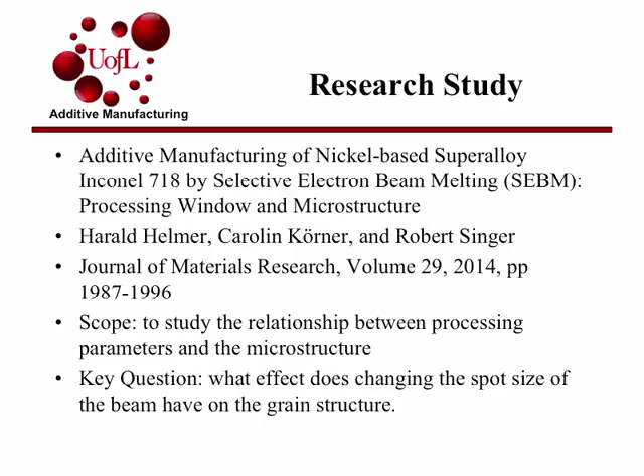One of the key questions they asked was, what effect does changing the spot size of the beam have on the grain structure?

So, experimental approach: they used gas atomized nickel-based superalloy. There's a picture of gas atomized powder.

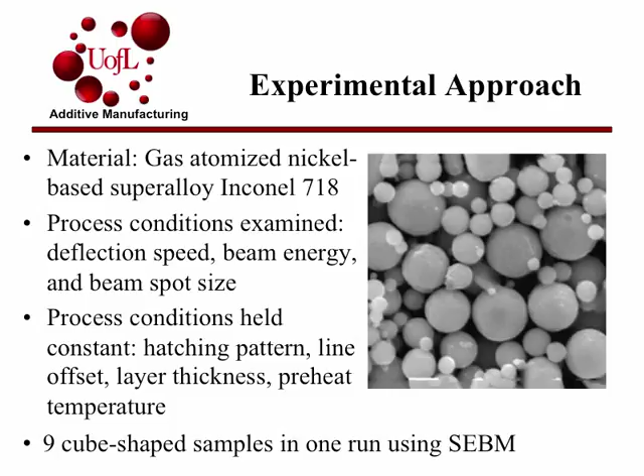The process conditions that they changed throughout the study were deflection speed, or how fast the beam is moving along, the beam energy, and the beam spot size. They left all the other process conditions constant, like the hatching pattern - they did one layer this way, then rotated 90 degrees - and kept the line offset, layer thickness, and preheat temperature the same. For this study, they just made one run and made 9 cube-shaped samples from it using SEBM.

So the key results from the first study: how do the process conditions affect density and top surface unevenness? The left graph is for the larger spot size, I think 500 micrometers, so the defocused beam, and the right graph is the focused beam.

In both cases, the black markers are the preferable conditions - each marker is a different process parameter condition. The black dots were preferable; if it was white, it was porous; if gray, it was dense but also uneven. We'll get into why that happened. But that was the same in both cases, except the slope is changed on the right.

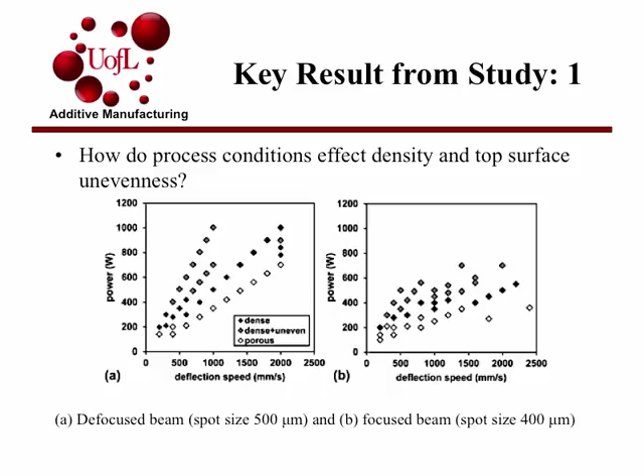So they theorized that the porosity occurs due to the beam moving too fast, or too high deflection speed, or low beam energy, which kind of makes sense if you don't get sufficient melting from either moving too fast or not having enough energy into the material.

And unevenness occurred from too much energy - slow deflection speed or too much beam energy into the material. I was trying to think of an example - if anyone's ever stick welded, if you go too slow, you get too much of a puddle and it just splatters and goes everywhere. That might make a little more sense.

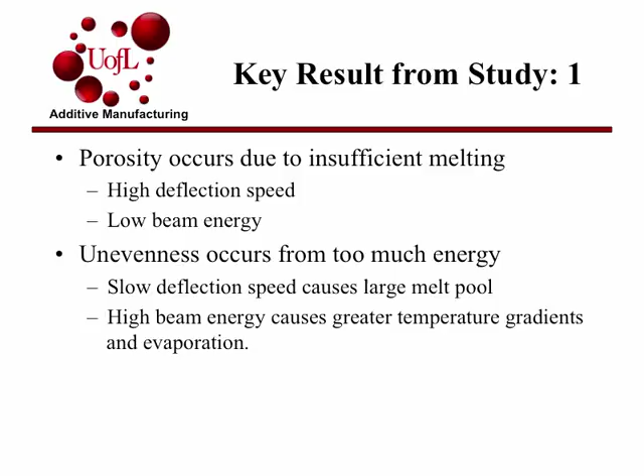Key result from study 2: what effect does the beam spot size have on the grain structure? The defocused beam resulted in a better columnar grain structure, which was preferable for high temperature applications - that's on the left. The right was the focused beam, and you can see all these stray grain formations, which also had a lower mean grain width.

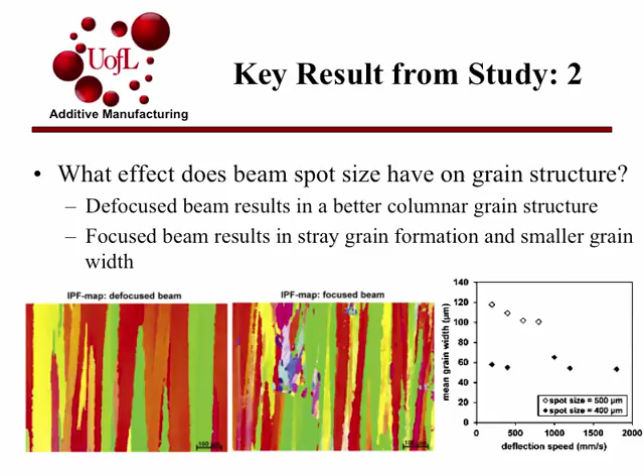So that's this graph over here. The black dots were the focused beam, and the white were the defocused, and on the left is the grain width. You can see that with the focused beam, all of the grain widths were smaller than the defocused beam.

In summary, porosity is a result of insufficient melting, and surface unevenness is a result of high forces exerted on the melt pool.

In this study, the defocused beam spot size, or larger spot size, was preferred for two reasons. First, at a higher peak energy, the focused spot size had a higher peak energy density, which led to higher evaporation pressure and more melt motion, which led to more surface unevenness.

The second reason was that the focused beam enhanced the formation of new grains, which hindered the development of the columnar structure that they wanted.

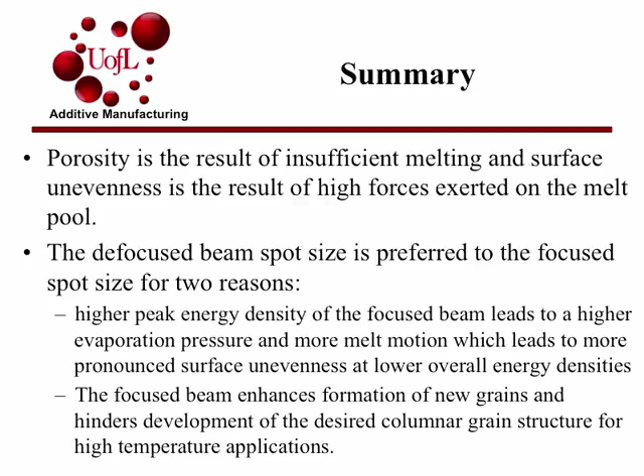For my own summary, I think the paper was relatively straightforward and easy to follow, although, to be honest, I didn't really understand a lot of the grain literature they were talking about. But other than that, it was pretty good.

My paper was Microstructure Characteristics of Inconel 625 Superalloy manufactured by Selective Laser Melting. It was from the Journal of Materials Science and Technology in 2015, so it's a pretty recent study. The scope of the study was the microstructure of SLM Inconel 625 parts.

Previously, Inconel 625 has been studied quite a bit, and most of the studies focused on the macrostructure. The one study I mentioned that talked about the microstructure was using a different process. So these researchers wanted to experiment with looking at the microstructure from the SLM Inconel 625 parts.

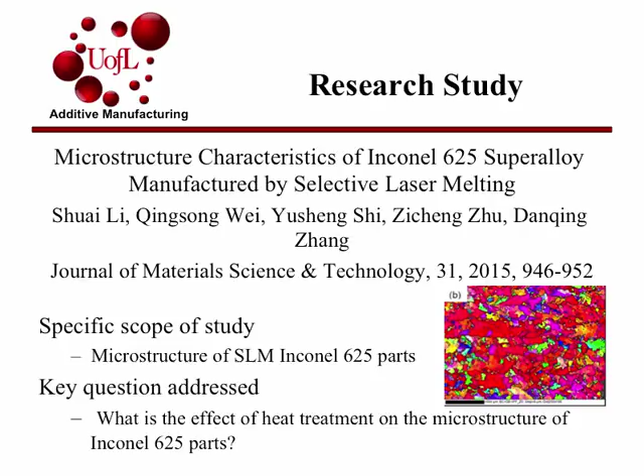The key question they asked was: what is the effect of heat treatment on the microstructure of the Inconel 625 parts? This picture here is an inverse pole figure from the samples, and it shows the texture of the samples, and each color represents one grain.

The material used for the experiment was the Inconel 625 alloy, and that's the composition of the alloy right there. It's 53.5 weight % nickel, has chromium, iron, and the elements that strengthen the alloy were Nb, niobium, and Mo, molybdenum.

The process conditions examined were the lattice constant, the distribution of carbides, and the microhardness. They used a scanning electron microscope, electron backscattering diffraction, and X-ray diffraction.

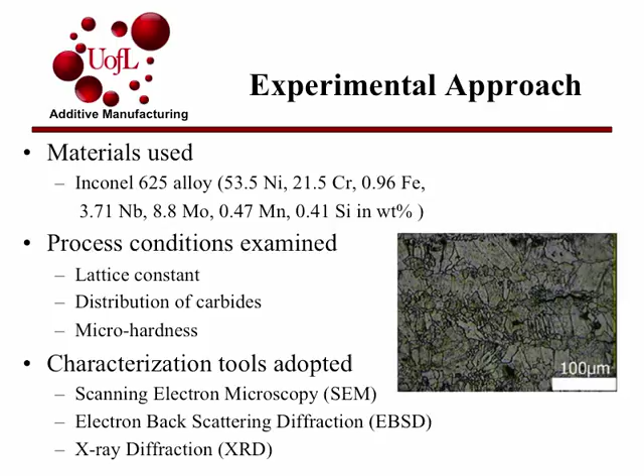This picture here is an optical metallographic image of the sample after it had been annealed at 1150 degrees Celsius.

The first result from the study is: what is the effect of annealing temperature on the lattice constant? The lattice constant is actually the physical dimension of the cell unit in the lattice structure. The graph on the left is the X-ray diffraction results of the different annealing temperatures.

They annealed the parts at 700, 1000, and 1150 degrees Celsius. The graph on the left was just showing that after the annealing, the microstructures of the samples were still basically the same as straight out of the selective laser melting process.

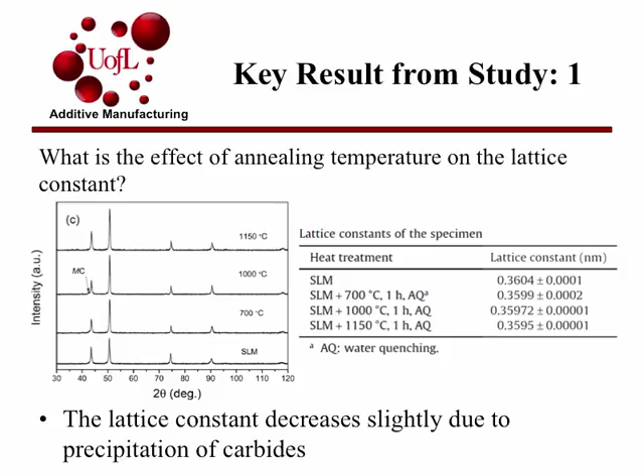The results were that the lattice constant decreases slightly with the annealing temperature, and this is due to the precipitation of carbides during the phase changes caused by the annealing temperatures.

The second result is: what is the effect of heat treatment on grain orientation? After they annealed at certain temperatures, the grains kind of melted into these rectangular shapes, and they all had the same orientation, showing that the grains had a preferred orientation after the heat treatment.

These two pictures represent this zigzag grain boundary, and they talked about how this is generated by the MC carbides during the process, and how the zigzag pattern helped improve ductility and toughness and the overall performance of the alloy.

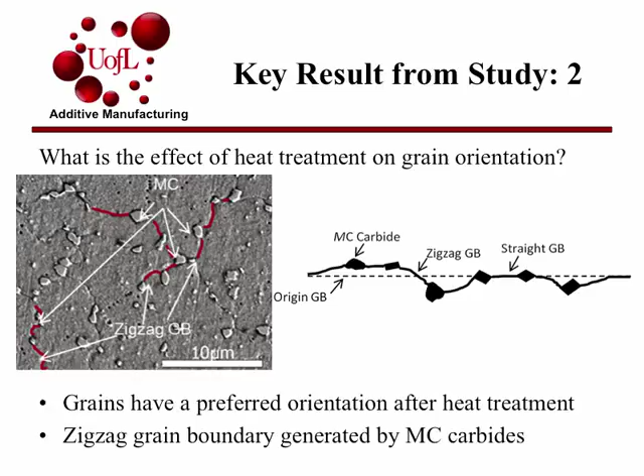The key conclusions from the research paper: the microstructures after the heat treatment are similar to the SLM original state. However, the lattice constant decreases slightly. The grains have preferred orientation, and the zigzag grain boundary forms after the heat treatment.

And the hardness of the SLM parts was very high due to the fine microstructure of the parts.

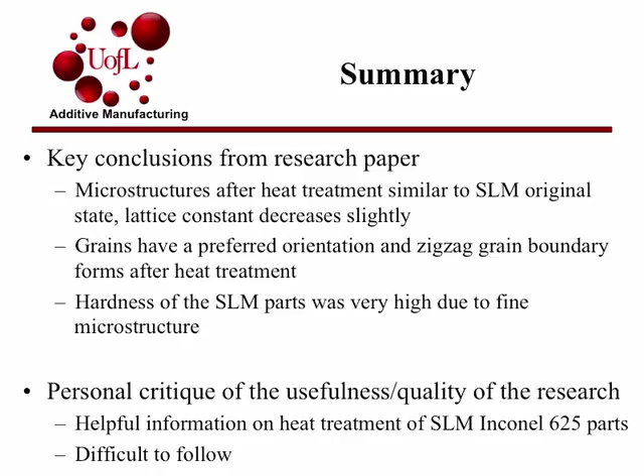My personal critique of the research: I guess the information on the heat treatment of the SLM Inconel 625 parts would be useful. I found the paper very difficult to follow. I really just couldn't understand what they were trying to convey and what they did. Actually, I don't think they explained what their sample specimens looked like. So there's a lot of unclear things in there. I just kind of had to follow along and figure it out.

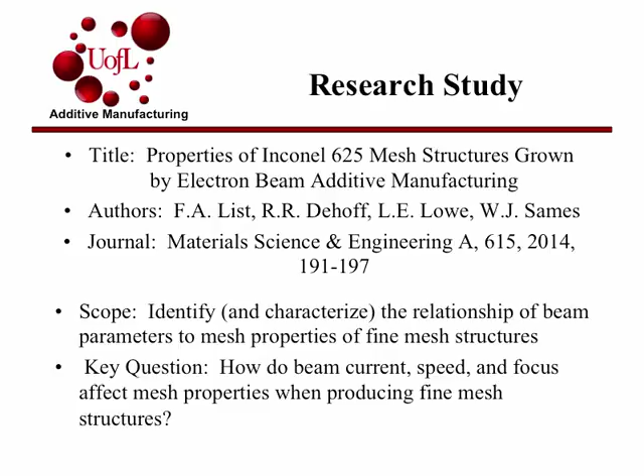I also read a paper on Inconel 625. However, the paper I read used a different manufacturing technique versus selective laser melting—this one uses electron beam melting. The title was 'Properties of Inconel 625 Mesh Structures Grown by Electron Beam Additive Manufacturing,' a fairly recent study from 2014, published in Materials Science and Engineering. The scope focused on the relationship between electron beam parameters and physical properties of the mesh structure, such as mass and relative density.

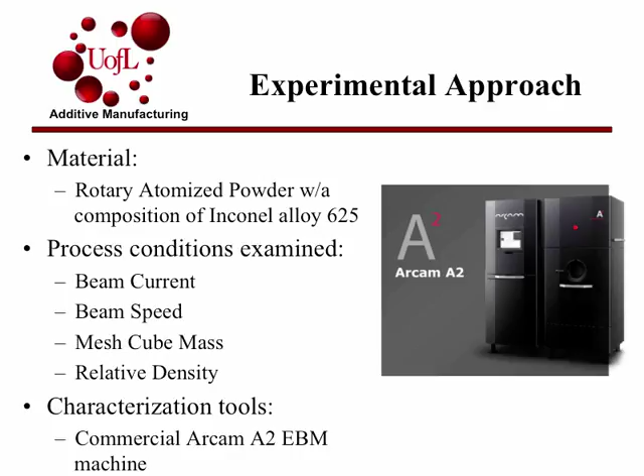The key question was: how do beam current, speed, and focus affect mesh properties when producing fine mesh structures? The material used was rotary atomized Inconel 625 powder, with a composition similar to what Nick showed in his presentation previously. The conditions examined were beam current, speed, focus, as well as mesh cube mass and relative density. The characterization tool used was a commercial Arcam A2 electron beam melting machine.

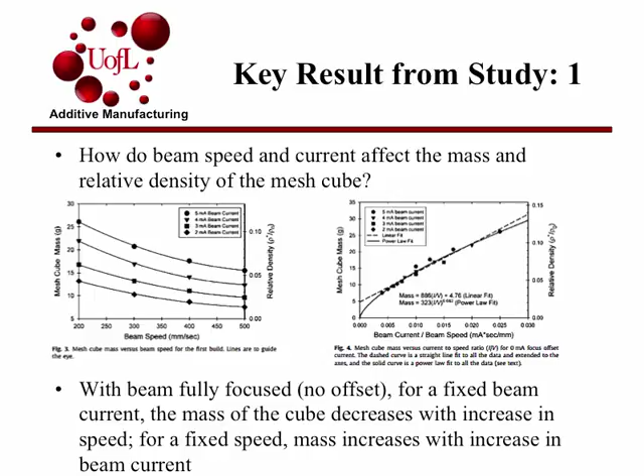On the right, the same parameters were compared using a ratio of beam current over beam speed, and again with an increase in beam current there is generally a linear relationship showing an increase in mesh cube mass and relative density.

The second key result from the study involved focusing the electron beam. When accounting for different offsets in the beam focus, for a fixed beam energy ratio—the ratio of beam current over beam speed—the mass increases for an increasing beam offset. At the lowest offset of 0, the results match what we saw in the previous graphs with no offset. As you increase the offset, both the mesh cube mass and the relative density increase.

The relative density was based on the original mesh cubes that were made, which had dimensions of 30 millimeters by 30 millimeters by 30 millimeters. The original density, I believe, was something like 0.08.

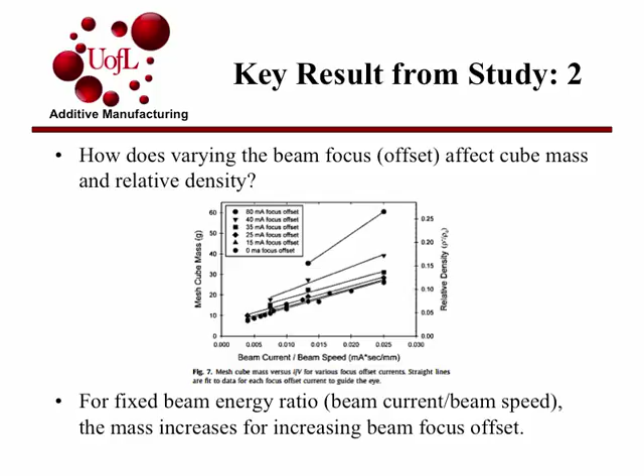The key conclusions from the research paper were that the mass of powder melted is roughly proportional to the energy delivered to the system when producing the part, and that defocused beams, as shown in the previous graph, distribute energy over more of the powder bed, creating a more even melting of virgin powder during the process.

My personal critique of the paper was that it was very well-written with well-documented results. It was easy to follow and understand the conclusions they reached. However, there was a lot of information in there—more than could be contained within a short presentation like this. They also observed factors such as stress and strain on the structures once they were loaded after being produced.

This kind of research was useful for applications involving the need for parts to have varying physical properties or distribution throughout the same part. The paper specifically mentioned an osteo application with bones, and how different interfaces between bone tissue could experience different mechanical and physical properties, and how a varying distribution of these properties would be useful for such an application.